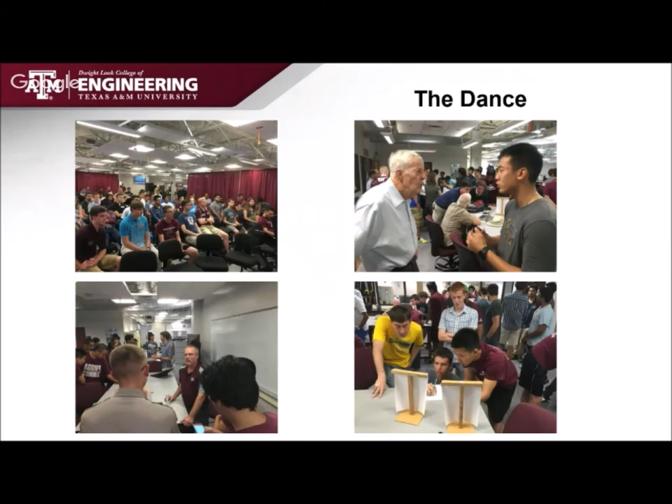Here's the dance. You started out getting going. You started talking to your mentors. You started finding out about need statements. You started forming your teams. There was this dance going on. It was speed dating. You had a great time. We fed you pizza. You found out what was going on.

Then the design. This is where the hard work started. This is where you started to understand a little bit more about what was going on. You were starting your design process. We told you, and you gave us 3 or 4 different designs, and then you had it down selected. Then you started building. I'm really excited about some of the builds that y'all have.

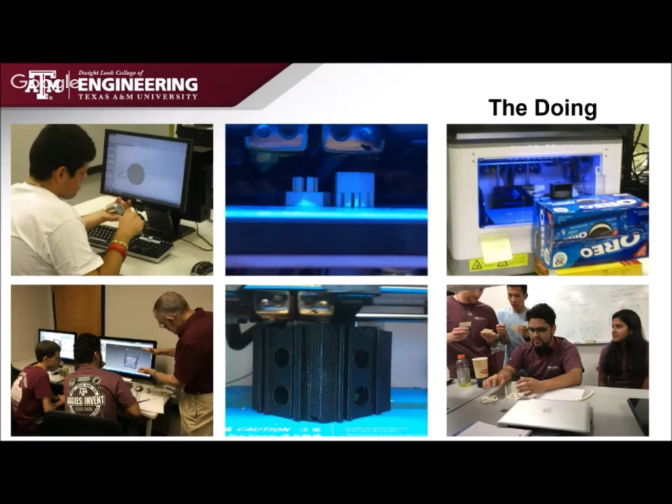Building, just so that you know, we had over 150 3D print jobs printed this weekend. That represents almost 500 individual parts. So we printed the heck out of things this whole weekend. Y'all did a great job of coming up with designs. You did a lot of testing. We saw some failures. We saw some great successes. So outstanding on that piece of it.

We watched a little bit of Aggie football. We streamed it. Whoop, and we won. Whoop. However, deadlines loomed, and the interest in the game waned really quickly. The entire place cleared out here in about 10 minutes. We watched the opening drive. The Aggies didn't do so great in their opening drive, and everybody kind of goes, I got to work on my presentation. So they left. Sleep was optional.

All right. So found some people sleeping on chairs under the 3D printers. I wanted to make sure they kept the jobs going. Found some people sleeping on couches, you know, wherever. But sleep was optional throughout this entire weekend.

Now's the deal. Now it's time for you all to sell it. We've got an outstanding selection of judges here, and I think you're going to enjoy seeing what we've got. You got 10 minutes for your presentation. Everyone take a look around. Turn around. See that timer back there?

It's going to start when you start. When it goes to 0, I'm pulling you off the stage. The reason is because it's not fair for everybody else. The judges will have 5 minutes to ask questions, and they'll be scoring you throughout the entire time. After we get finished, the judges and I are going to go into a room. We'll make some decisions, and then we'll choose first, second, and third place teams.

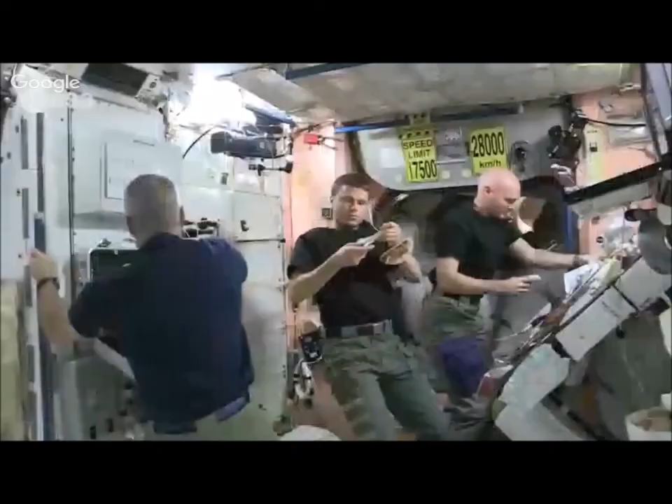A serious problem on the International Space Station is foreign object debris. Particulates such as hair and skin, food crumbs, and chips or fibers off of everyday objects can make their way into the station systems or an astronaut's eye.

My left eye slammed shut in great pain, and I couldn't figure out why my eye wasn't working. I was thinking, what do I do next? I thought, well, maybe that's why we have two eyes, so I kept working. But unfortunately, without gravity, tears don't fall. And so you just get a bigger and bigger ball of whatever that is mixed with your tears on your eye until eventually the ball becomes so big that the surface tension takes it across the bridge of your nose like a tiny little waterfall and goes goosh into your other eye. And now I was completely blind.

This device uses common adhesive materials such as duct tape to catch the debris that passes through the outer case, which then gets trapped by the sticky core. The Clean Sweep is also strong enough to withstand wall impacts of 5 feet per second or more without breaking or fracturing. You can stick it to the wall or let it float around to catch debris passively. In addition, you can physically grab it and sweep it through the mess for a quick cleanup.

So we are Team Clean Sweep, and as the astronaut you saw in the video, Chris Hadfield, said, there is no situation that you can't make worse, and this is especially true in space. If particulate debris is floating around, it can get into sensitive systems, it can get into experiments, it can get into your eyes or lungs, it can be a big problem.

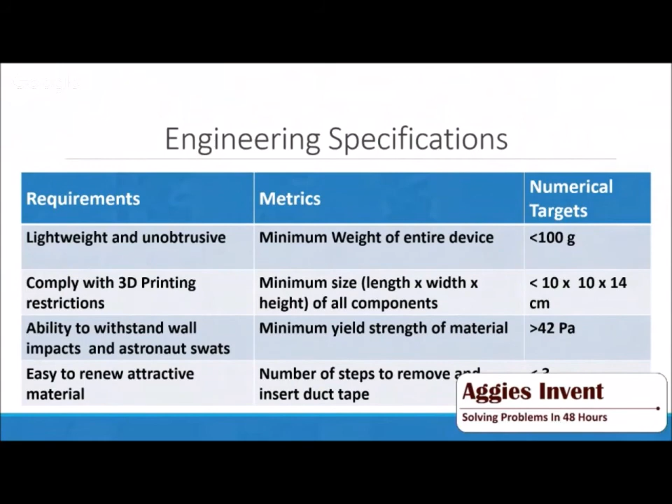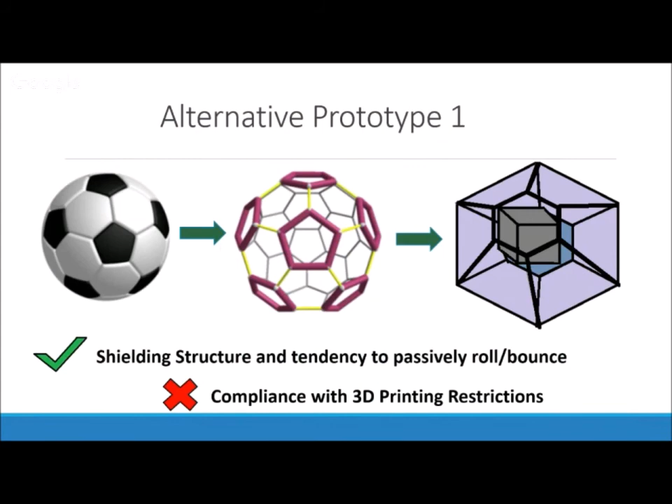Before we arrived at our final design, we had a couple of alternative ideas. We first thought of the structure of a soccer ball, and we saw that this would provide a strong shielding structure as well as be able to roll and move freely throughout the ISS. However, this wouldn't fit within the restrictions provided by 3D printing. We also thought about analyzing swallow birds, and how they use their beaks to capture insects and bugs while flying through the air. So we wanted to implement an inverted sticky structure that would maximize the surface area and easily trap particles. However, this would require some sort of propulsion, so we discarded this idea as well.

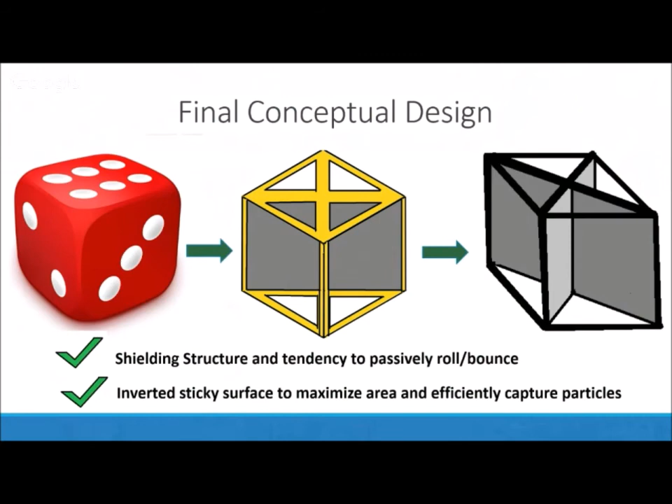Nonetheless, we combined the advantages from the previous two ideas into our final design that was based on the structure of a die. So we made sure it was structurally sound, it could roll and move around freely, and we also used an inverted sticky structure to maximize the surface area to capture particles.

We did some mathematical analysis using basic kinematic equations and the velocity given to us to find the pressure that would be exerted during a collision on our structure. We found that this pressure was such a small number. It was 10 to the power 5 times smaller than the actual yield strength of our material, which only goes to show that within a wide safety range, our structure is strong and structurally sound.

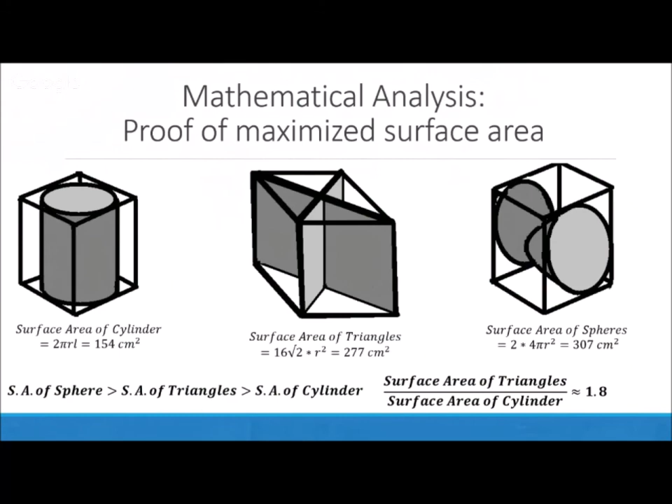We also analyzed the surface area of different designs. We found that our structure would be the best because it would provide 1.8 times larger surface area than that of a cylinder, and the spheres would provide a slightly larger surface area, but it would be a lot harder to wrap the tape around the spheres, so given the simplicity of the structure, this would be the most optimum design.

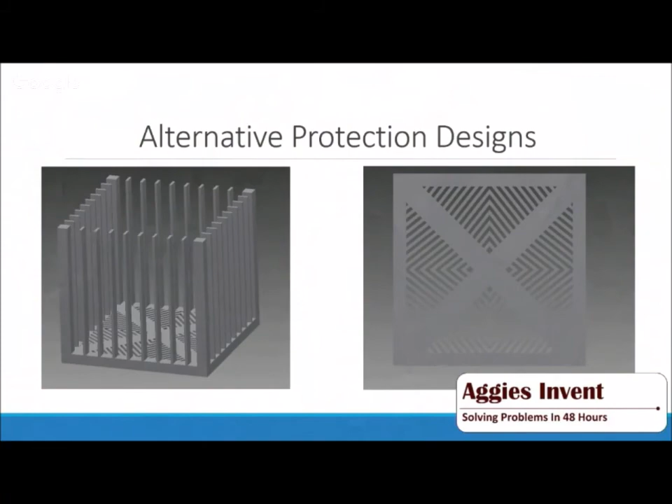As mentioned previously, we have definitely evolved from a popsicle stick design to a really nice 3D printed model. Our end product really met the size requirements as well as the weight, which is only 35 grams as opposed to the 100 gram limit. In addition, we were able to implement a dual tape application. When it's passive and floating around the ISS, there are tapes on each end of this cross section, kind of like a filter. But if there is ever a spill, an astronaut can easily tape it inverted and wrap it around in less than 30 seconds to sweep up all the mess. And we've tested it. It's very structurally sturdy. It's small, doesn't get in the way, and it's a really neat design.

For some alternative implementations, we can use this as a portable storage device. If it's floating around and you happen to have a pen, you can store pens in there. We can use this for recreation purposes as well, putting LED lights or even using this as a die to play games. And lastly, we heard from a few astronauts that it may get a little smelly inside, so you can actually open the cartridge and put an air filter there too. So there are many implementations for this. For future improvements, we can add some photoluminescent materials to light up the way when it's dark on the ISS.

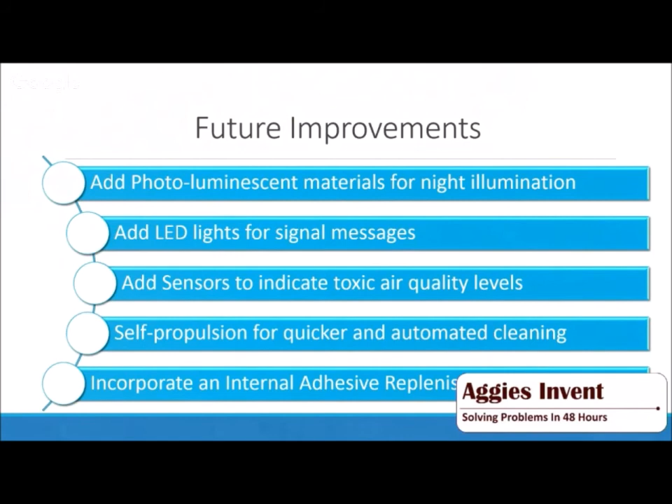We can also add some LEDs to it to determine when you need to change the adhesive materials. We could also add some sensors, if we are allowed to use some circuitry, to detect toxic air levels within the ISS. We can also add some self-propulsion so that it can be completely autonomous. It can just cruise around the space station and clean up areas that it needs to clean up.

Then also we can incorporate a system where they have the tape inside of the system itself. So instead of astronauts going about trying to find materials to put onto our Clean Sweep, it's actually in there and you can dispense it and then apply it as well.

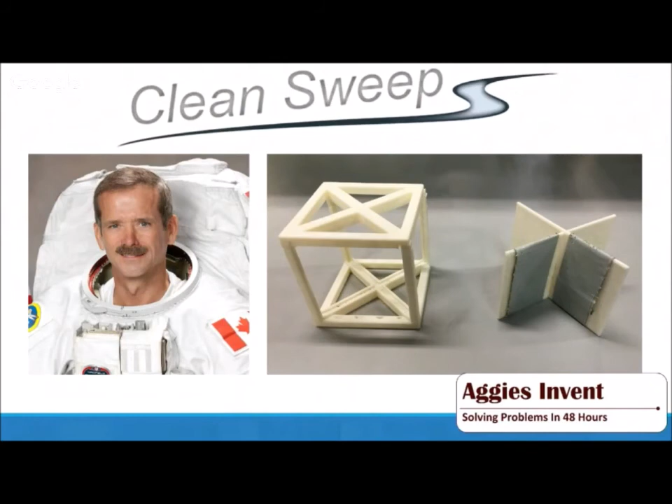And so the main problem on the ISS, or a big problem that Chris Hadfield was talking about, was the debris on the ISS. These debris get into an astronaut's eye, hinder them from doing their job, and also these foreign objects can get into different electronics and potentially harm and damage them. So we decided to create the solution called Clean Sweep.

The way it works is that you apply the adhesive on the inside and also the outside if you choose to. Then foreign objects will come and attach themselves to the Clean Sweep, and it stays on, it doesn't come off. So you can pass that around if you want.

So it's a very simple system, and we developed it to be 3D printed on the ISS. So instead of sending these up to the space station, which is both costly and not efficient, we can send up our plans, have them manufactured on site and assembled, and it just makes it a lot more efficient and a lot easier for the astronauts. This system also has a high potential to be something greater, and that is why we decided to develop the Clean Sweep. Thank you.

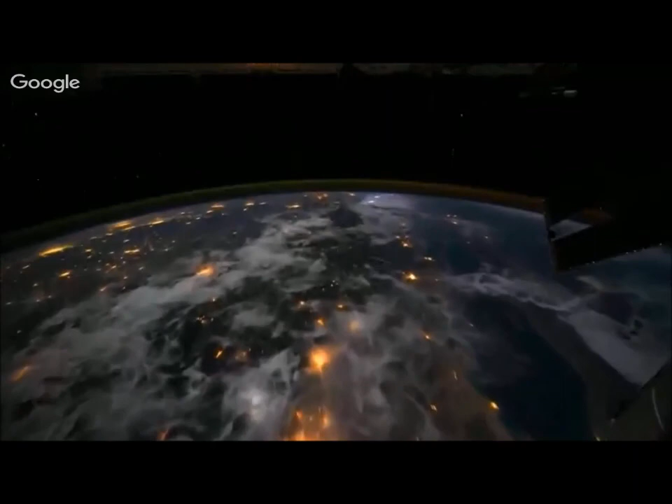A famous Jedi once said, "Do or do not, there is no try." Every year, billions of dollars are spent on space research. Data for this research is collected through the use of several large satellites. Enter the CubeSat.

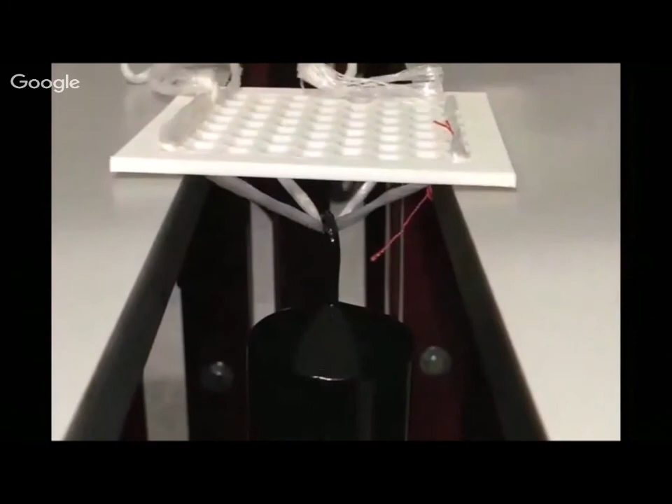CubeSat is a picosatellite that simplifies satellite design immensely and is contained within a 1-liter volume cube. Today, the ISS has 3D printing capabilities, providing opportunities for a revolution in CubeSat manufacturing. Now, instead of a CubeSat being assembled and launched in one piece, we can 3D print the frame and assemble it on the ISS. Welcome aboard Cube Station. Cheaper and lighter. Cube Station, the universe in our hands.

Howdy. I'm Mark Wager. I'm Nathan Glazer. I'm Andy Castrua. I'm Siva Praneeth. I'm Ronak Mohanty. And we are Cube Station, CSAT for short.

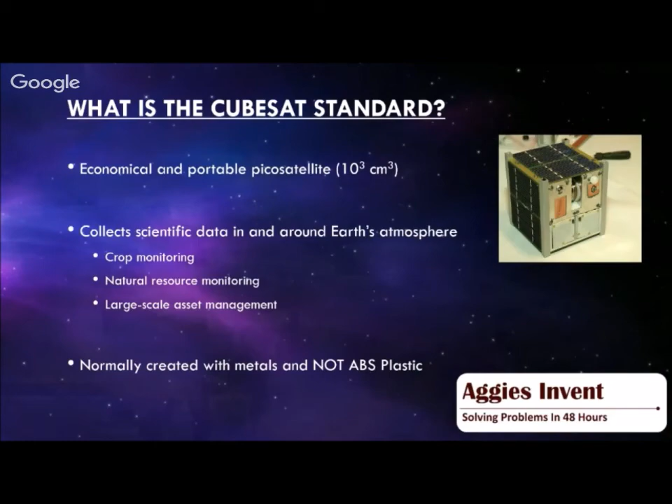What is the CubeSat standard? Well, CubeSat is an economical and portable picosatellite that is roughly 10 centimeters cubed. What it's used for is mostly for collecting scientific data in and around Earth's atmosphere. Applications include natural resource management, large-scale asset management, and also crop resource management.

Normally, a CubeSat is created with either aluminum or steel parts and shipped up via rocket to the ISS and launched from there. However, we plan to use a 3D printer on board the ISS and print it with ABS plastic. Now, you may ask, why CubeSat? Why not just a regular satellite? Well, CubeSat is significantly cost-effective compared to these large satellites, and it's very modular in design, allowing for easy shipment and very easy redesign.

Okay, so over the past 48 hours, our main objective was to design and develop a telescope support structure that can be 3D printed in space. We were given this project statement with a set of constraints. Part of these constraints contributed to size considerations, as well as putting solar panels onto the outside, and the final structure being able to withstand a deploying force of 45 newtons. We also wanted the entire structure to be easy to assemble and to contain as few parts as possible.

And what sets us apart is our stretch goals. The main stretch goal is that we want to print something roughly 3 times the print volume. That way, the astronauts printing this material don't have to babysit the 3D printer as they go through the cycles. We also put in considerations for electronics, because that is one of the main reasons why most satellites fail in orbit.

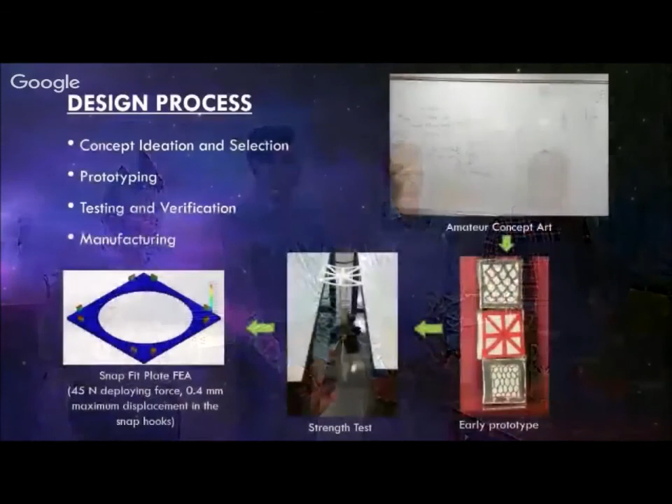We met these design criteria through our design process. First, we went through whiteboard concept development, then prototyping, then subcomponent testing, and eventually we covered manufacturing processes.

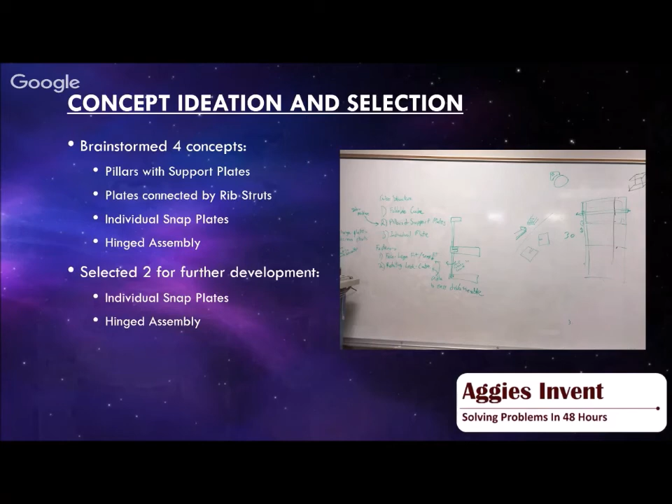Our initial brainstorm yielded 4 solid concepts that we were interested in implementing for our own CubeSat design. From these 4 designs, we narrowed down our advantages, and after the first night, we only developed 2 of those designs. The first was to print individual faces for these cubes and assemble them via snap hooks. The second was to have pre-assembled hinges on the structures themselves to reduce the assembly time and number of components.

So instead of printing a bunch of large assemblies that we weren't sure would work or fit together, we decided to test the individual components before moving to the assembly level. As you can see, we printed out individual faceplates, hinges, and snap hooks, and tested those individually for feasibility as well as strength, for example, on the faceplates.

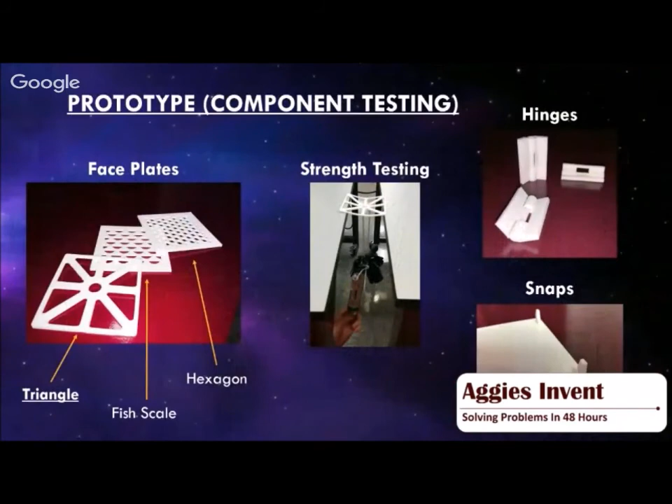One of the more notable discoveries from this method was that these hinges could actually be printed in place, yielding a pre-assembled hinge right off the printer. Those are printed vertically, as you can see in the upper right picture there. The judges are looking at those right now. We actually have a hinge that works right off the printer.

From that component testing, we also looked at a benefit analysis of where we want to move forward in our design. Our two main choices were: do we want to use those snap hooks and rely on individual plates hooked together, or did we want to pursue the hinge design? Ultimately, we decided to move forward with the hinges because even though they require stricter tolerances to get the clearances right, the assembly savings they provided were a great benefit for the astronauts.

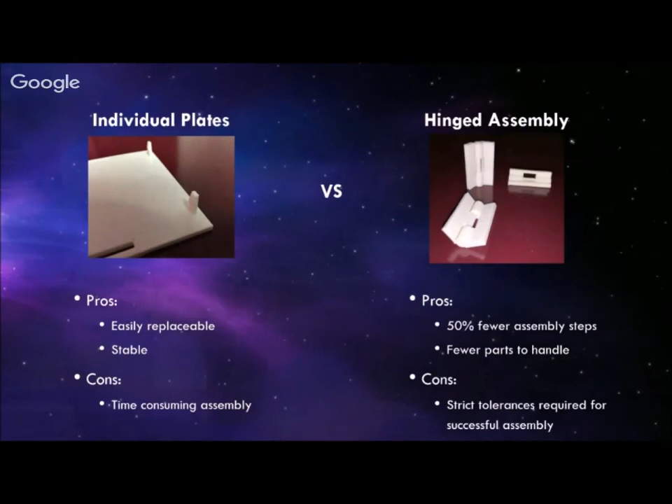This is our final design of one unit of the cube. We will use 3 such units to form our assembly.

As Nathan pointed out, the main constraint we had was to build the entire set of 3 cubes within a given volume of 10 by 10 by 14 centimeters.

On your right, you can see the printed configuration of this stacked structure of 4 plates. This will save a lot of maintenance time for astronauts, because they are printing everything in one single print rather than 3. On the bottom right, you can see the assembled configuration.

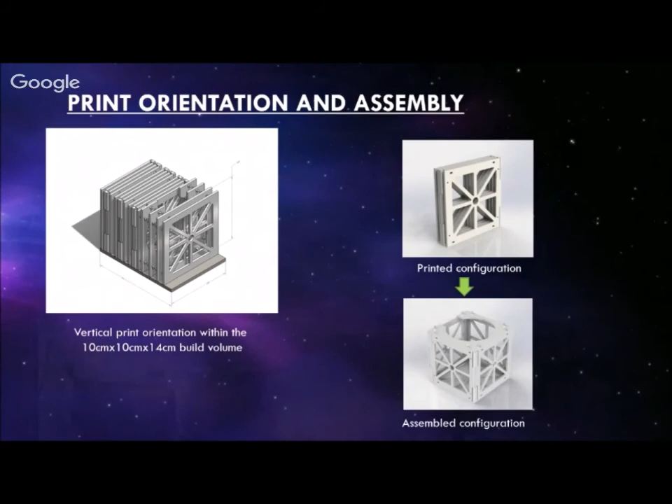The printed configuration can be folded out and snapped together to form a square structure first, and further supported with the help of support plates on the top and bottom, which also reinforce the support for the telescope.

Zooming into the detailed view of the salient features, one of the most important is the hinges, as Nathan pointed out. The hinges reduce the assembly time, and we are using 3D printing to our advantage here to save that much time.

We are using traditional snap hooks to reduce the assembly time again, and there are provisions for holes for the solar panels, and we have the optimized structure for mass reduction.

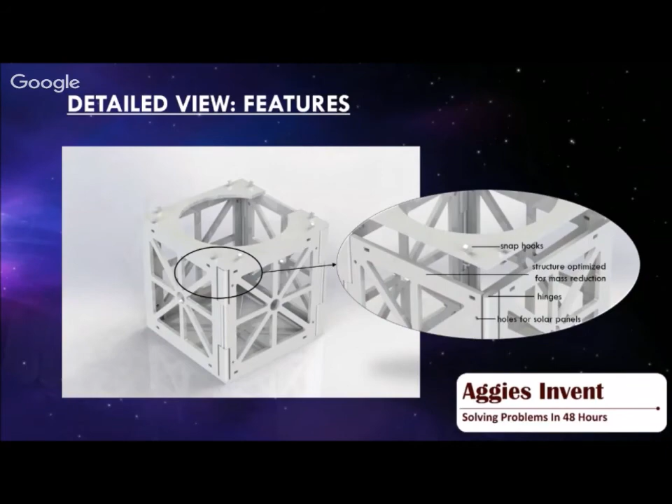So as you can see, the final assembly on the screen: you have the 3 cubes stacked over each other. We have the provision for the telescope, the bottom one for electronics, and provisions on 4 sides for the solar panels. This is how the final assembly would look with the solar panels on it.

What you see here on the table is the final representation that we 3D printed. You have this triangular structure saving materials, the hinges, and the snap fits here. You can have a look.

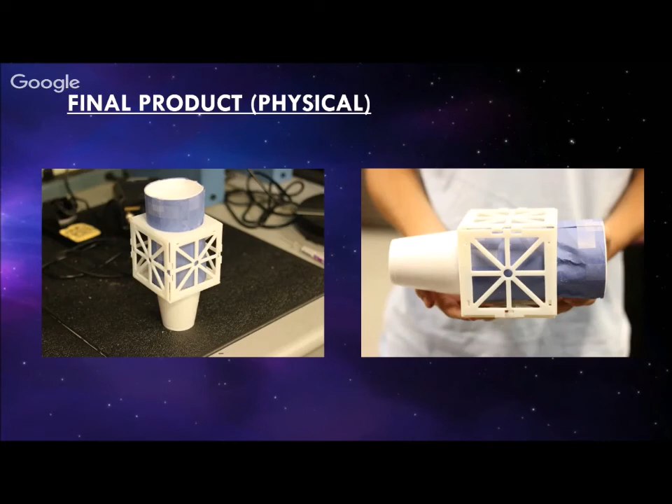Unfortunately, a purely mechanical solution may overlook one of the most common failure avenues for orbiting satellites, called total ionizing dose. On Earth, when charge builds up in a cloud, eventually there's enough voltage difference that there's a dielectric breakdown, causing lightning. The same thing can happen with any dielectric.

ABS plastic is actually pretty close to air in terms of dielectric constant. So as charge accumulates on one side of the satellite from particles emitted from the sun, eventually there can be a static discharge that can destroy electronic components.

In our design, we've accounted for this. We've allowed for attachment points for a Faraday cage that protects all of the inside components from this sort of damage.

Now coming to cost: manufacturing a traditional aluminum CubeSat would take around $300,000 US, which is a lot of money. To make 3D printing feasible, the raw materials weigh less than 200 grams, and the weight of the CubeSat would be less than 1 kilogram. The final deploying cost would be around $80,000 US, which is significantly less.

So it's wiser to manufacture the CubeSat on the ISS rather than sending them from Earth, which costs a lot, and this saves material, time, and money for the astronauts and the space research as well. Do you have any questions?

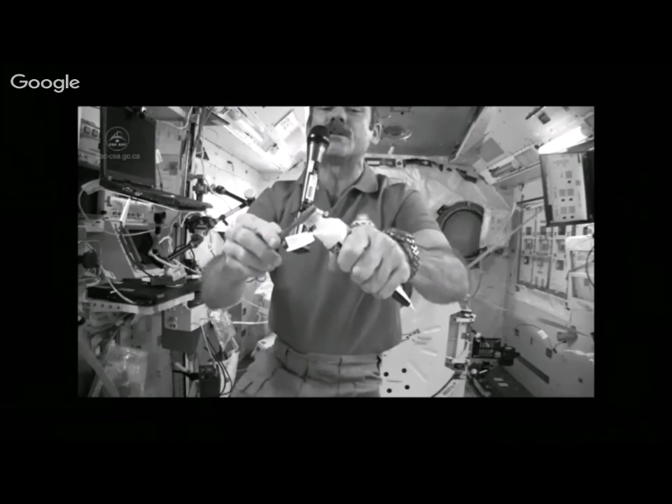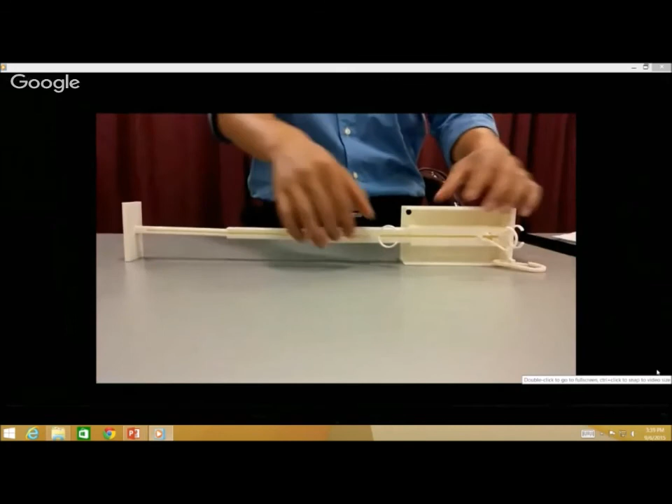All right, so as you can see, we're group AstroLog. We're actually crew convenience, so our needs statement wanted us to design a reliable, versatile, non-intrusive, space-efficient organizing equipment. So I'll leave it up to my teammates.

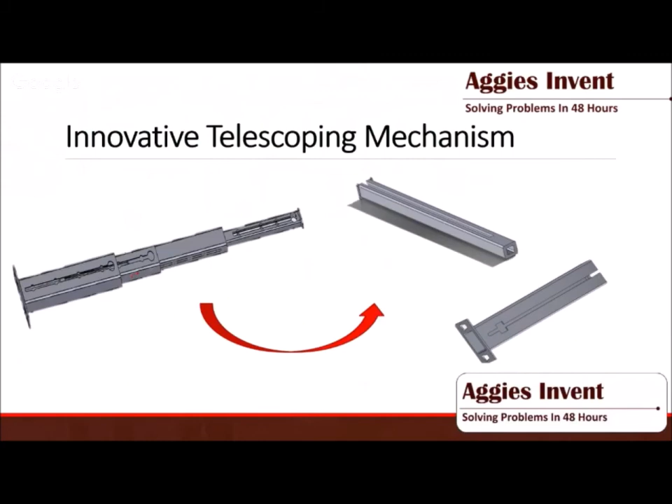So as you saw in the video, we have a telescoping mechanism that we're using to expand our restraining device to allow more tools to be set. So we have a T-groove running from the right end to the left end, which could be used to enter the restraining fixtures and slide all the way in. And we have enough clearance for them to slide around, but not so much for them to come out, rotate and come out of the device.

So the main concern was multi-utility, so that we could store small and mid-sized objects in the device. But working in microgravity, most of the locking mechanisms that we use are in some way or another connected with gravity, so we didn't want to use the traditional ones.

In microgravity, we used ABS plastic to our advantage. First of all, no weight, or very less weight, so we didn't have to put a lot of concern into if they'll hold up or break - that was not our concern. Secondly, the ABS plastic is elastic, tough between 20 to 80 degrees Celsius temperature range, and has good impact resistance. So we decided to mainly take advantage of the elasticity for the fixtures to clamp onto mid-sized and small objects.

So the first fixture that you see on the left is a tool holder. Suppose an astronaut is using a bunch of tools and working on a project, he or she could clamp it onto a hammer handle, a wrench, a bunch of tools in there.

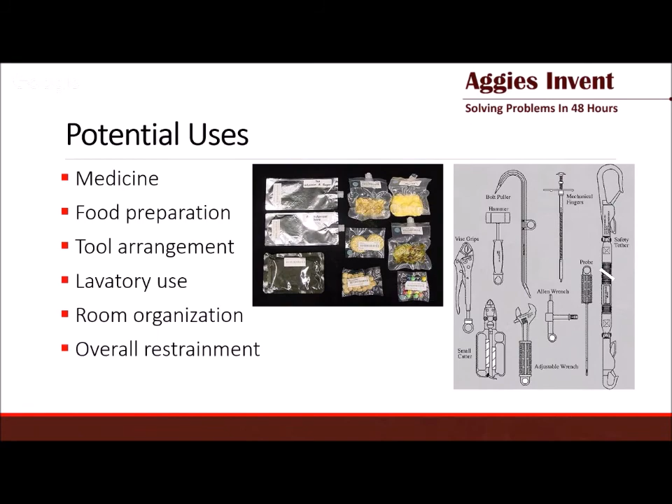We can also use it for lavatory use, so you don't hit yourself with a brush whenever you're trying to do certain things in the lavatory. And room organization and overall restraint. So anything you want can be kept to the wall. And as we talked, if you were to print two AstroLogs, you can keep anything attached to the wall. And the only limit is imagination for that use.

We want to say special thanks to these people; they have truly guided us, and we're truly thankful for all the help throughout these 48 hours. And we wanted to say special thanks to all of them.

I wanted to say at the end, AstroLog is a time-saving device. And in space, every second counts. Thank you very much.

What questions do you all have? Please. Is this left-handed or right-handed? Sorry? Which one? It could be either or, because you could rotate it any way. It's completely multi-directional as well.

And if I may, a second question: describe an awkward moment during these 48 hours in your team. An awkward moment? So the hardest part of designing this was the telescoping mechanism. We actually went through a lot of trials just to get that done. The first time we did it, it didn't go through. The second time, when we put it through, it slipped out, so it wouldn't hold. And then finally on the third one, thanks to Daniel, he made a groove at the end of each one and allowed it to pull out and hold in place while you stretched it. And when you closed it, it wouldn't come out. So that was, I guess, the weirdest moment. Yeah. 8 hours sprinting and then boop, falling off.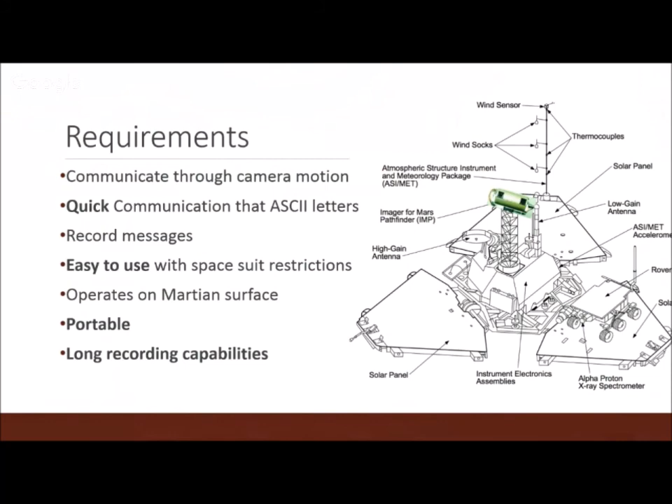It has to be portable, and instead of the limited space it has on the ground to just inscribe on the dirt each letter, it has to be able to record more than just a phrase, however long the space station needs to communicate with this astronaut. So this was basically the temporary solution. He would go inside and write something, and then he'd go outside, place it on there, and they would turn the camera so that the space station could communicate back to the astronaut. And so, of course, this took a lot of time. And so with our solution.

All right, I'm going to take over and talk more about the technical aspects of our proposed solution and how we ended up making it. So, as in the book, the character lays down the cards and rotates the camera towards them. The controller controls the camera. The controller is back at Earth, and in order to communicate, he controls the camera, moves it, points it towards the card that's placed on the ground, and then letter by letter, he forms a sentence. First, that requires the person to be in a spacesuit on the surface, and it's really time-consuming. So what we wanted to make was a mechanical translator and a decoder.

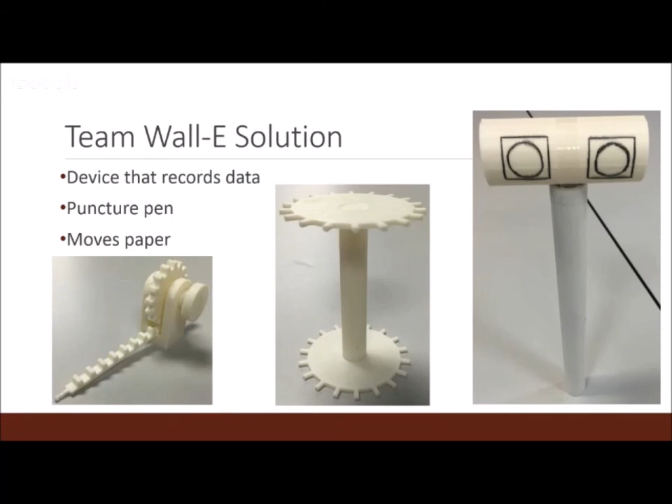That's its essence. The third picture that you see on your screen, the one with the eyes for lenses, that's what's provided. That's the camera on the Pathfinder probe. The first two images are the gear and rack assembly that we manufacture, and the second is the gear roll binder assembly. I'll talk more about it.

Then we had to decide what mode we are going to communicate in. How are we going to make sense of those angular movements? These are the only thing we're receiving as an astronaut in space. Like angular movements of the camera, like a 60-degree rotation along the y-axis. What does it mean? We had to translate it into a symbol to make sense of it. So we went over 3 different sorts of codes that we could use: Braille, Morse code, and a waveform. The waveform mechanism does not rely on a puncher base, a hammerhead, so we don't have to print that part. That's the first one we considered. Later we ruled it out. I'm going to tell you why.

So in the waveform mechanism, you can have a pen or a Sharpie or any writing instrument sticking out of it and use the angular rotation along this axis to inscribe a line on the paper that's held in the paper binder. What happens when you inscribe a line and then you translate the paper? You generate a wave. Every wavefront with a particular amplitude and a particular wavelength can be translated into a different symbol. But in that case, you have to establish the code.

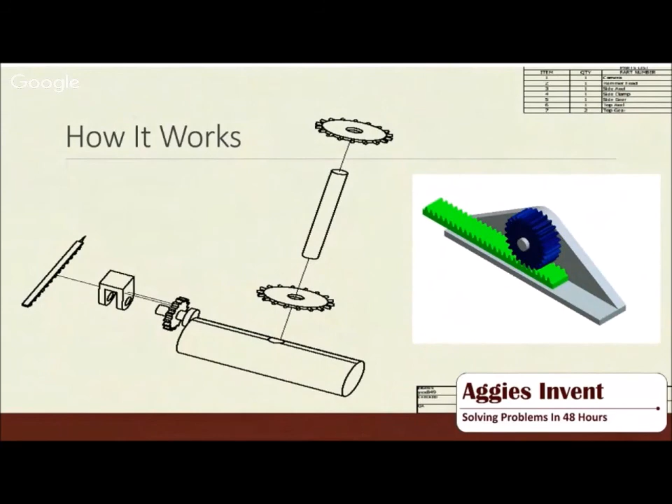Not too hard to do, because you can establish an arithmetic progression where every one angular rotation takes you to the next letter in the series. Not the hardest part, but pens are unreliable, and also something that we don't know if he has access to all the time and if he can use it. So we came up with a mechanical device that does not rely on having a pen or a Sharpie. So we went with Morse and Braille because they can be produced with a puncher-based mechanism, only with the use of the hammerhead.

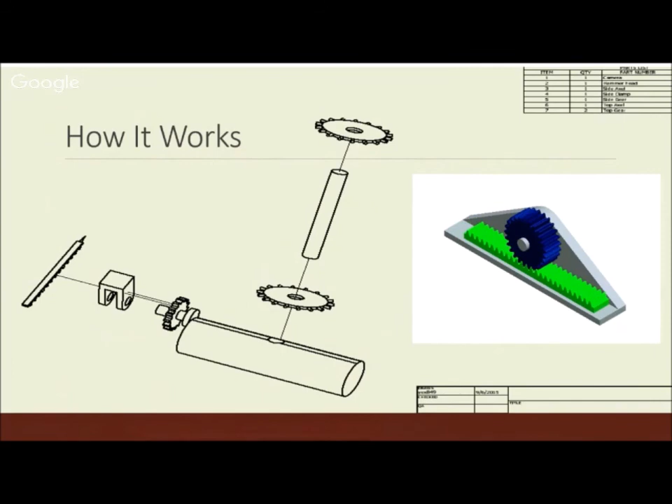As you can see in the assembly, that gear converts the angular rotational motion to the translation of the hammerhead. The green thing, that's going to be our hammerhead. It's just going to be pointing at one end. And the other parts in the exploded assembly that I'm going to go over are the axle and the two gears that you see at the top. They're going to be punched into a paper, and rotation along this axis is going to translate the paper along that line, just like you would do in a dot matrix printer or an old typewriter, where you would have 2 dots at the end. That's because the binder would have 2 gears at the end, and it would rotate and feed the paper.

Benefits. The biggest benefit, you don't have to be present on the surface. This thing will record messages for you. Totally. You don't have to be present there. It will keep a track of the recorded messages.

The only limiting factor will be how fast you can generate, which is the angular velocity of the camera on the Pathfinder probe, and the amount of paper you have access to. We are also making the assumption that we have quite a lot of paper, and duct tape is the only thing we can use. So that wasn't really a problem for us.

You don't need a pen. All the decoding can be done in the HAB unit. This is the unit the astronaut's going to be in when he's not outside. So limited interaction.

Beyond our project, one more important thing that we considered was when we are designing something to be 3D printed, a really important factor that we want to pay attention to is the reusability of each individual part that you print. What we are printing is just an assembly of gears, axles, racks, all parts that can be printed and reused for many applications. Thank you.

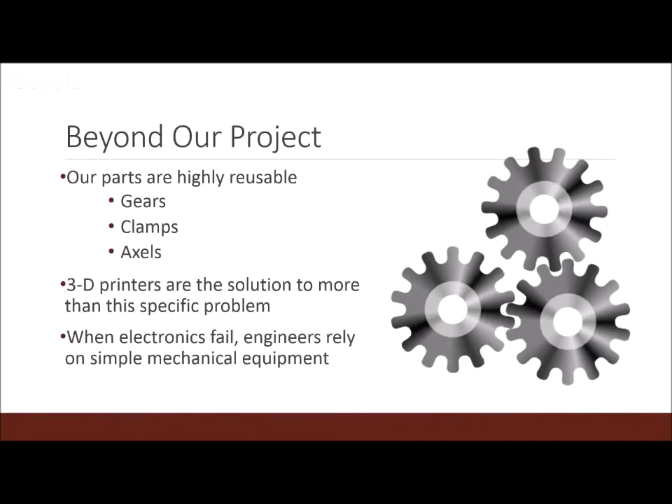Yeah, go ahead. So the dot matrix paper, are we going to bring dot matrix paper to Mars? No, we just said sheets of paper. Just the sheets of paper. The binder will pierce itself. That seems pretty integral to your solution. Yeah, it has to pierce through the paper, and then when it's rotating, that has to translate into translatory motion. It has to linearly forward the paper.

Any other questions? Is it possible to transmit emotion through this device? If it is possible to transmit emotions through text, then yes. Same process, same way. If you can make sense of what they say and what intent they wrote that message with, then I guess you can relate with the person who wrote it and what emotions were put into writing it. It's more like a personal thing. Okay, thanks very much.

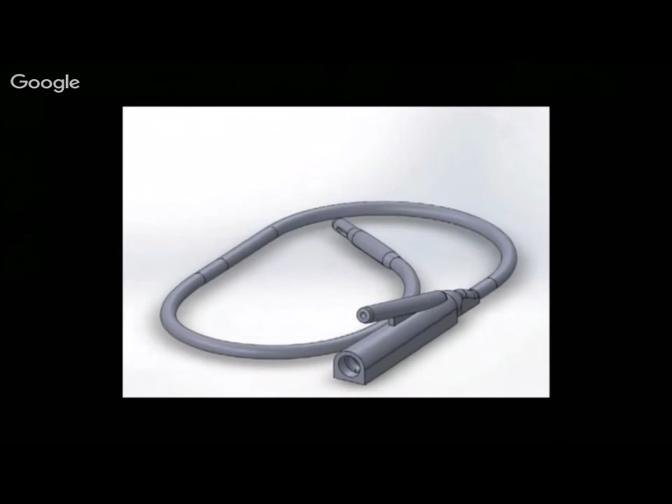It's such an easy thing to fix if you have the proper equipment, but it can be fatal if not. If I was the doctor going to Mars, I wouldn't let the bladder burst, but if I didn't have a catheter, I would have to surgically go in with all the possibilities of infection, bleeding and complications. I'd much rather have a catheter. If we can migrate to doing things in orbit rather than on the ground, we're going to be able to do more, do it better and save money.

I'm Jane. I'm Robert. And I'm Jacob. And we are Starfleet Medical. We were tasked by Dr. Kerwin to design a 3D printable Foley catheter to print onboard the ISS in case there's a need for replacement. As stated by Kylie Ryan, it's not a frequent problem, but it is a huge problem if it does occur.

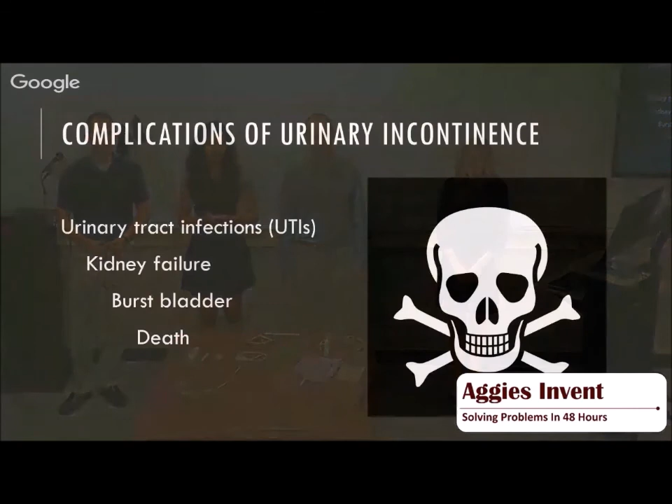When you're in space, microgravity changes the way that you feel the urine in your bladder. So when your bladder is super full, you can't really tell that you need to go and relieve yourself, which means a lot of astronauts don't go to the bathroom as frequently, and it results in urinary tract infections, kidney failure, a burst bladder, or death.

And when you're inserting a catheter, you take this tip and you insert it into the urethra, and once it reaches your bladder, there's a balloon here that expands and it anchors the catheter into the bladder. And once that is filled, there's a hole in the tip that drains urine from the tip of the catheter into a drainage port here that is connected to a bag like this.

So there are two main types of catheters. There's the Foley catheter, which we've been discussing, which we were tasked with designing. There's also a straight catheter. And so the advantage of using a Foley catheter is it can be anchored in place by the balloon for up to 30 days, whereas the straight catheter is a single-use catheter. You put it in, you evacuate the bladder, and you remove it. And so in terms of space travel, you'd have to take many of these to do the same job as one Foley catheter.

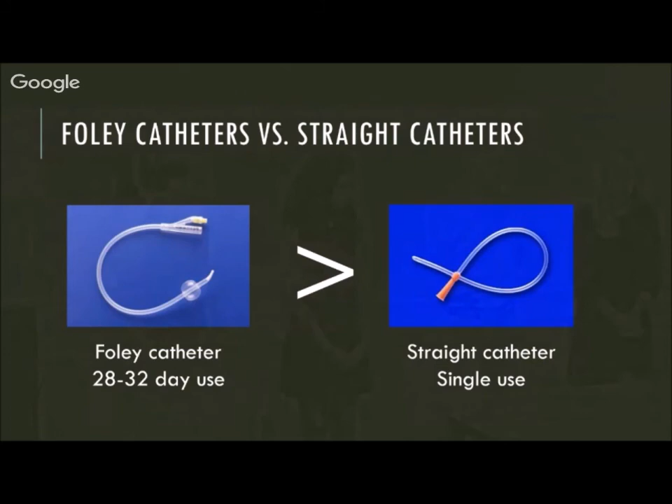And then some of the constraints we had to look at, since it is a medical device, we needed to be able to produce a sterile device that could contain bodily fluids. It had to be flexible to comply to the patient's physiology, and it had to be biocompatible. And then the two big constraints were we had to 3D print something that could be anchored and then removed, which was crucial. And so since we were 3D printing in plastic, we initially thought we couldn't do the balloon method, so we came up with 3 different ideas.

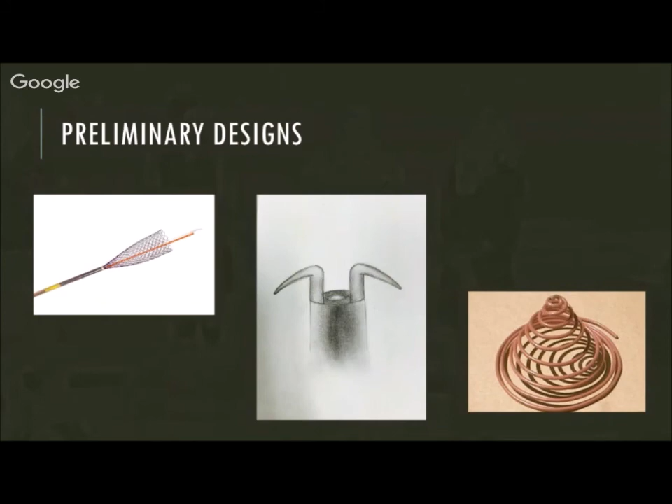And then our third option was using shape memory polymers, which when subject to a stimulus such as light or heat, will change shape. So we would initially have the shape be a straight rod, similar to these catheters on the table. And when you insert it and then apply a stimulus, it'll change to this spiral shape seen in the picture on the slide. And on the second day, we actually realized that there are companies printing in silicone, so we could revert back to the balloon method, which we're going to talk about now.

So the silicone that's been used in these 3D printers before is actually a medical grade silicone. This material already exists. There's no research and development that has to be done. You just use the material as is. And so using this material to 3D print, what sort of constraints are different from 3D printing compared to typical manufacturing methods that are done here on Earth? In order to accomplish these objectives, there's a few things that we had to change about our design compared to a typical Foley catheter design, primarily the inflation port, where the balloon is inflated, as well as the geometry of the balloon itself.

And the material that's used for the Foley catheters, the medical grade silicone, won't just have to be used for these catheters on the space station or in future missions. It can be used for a variety of medical applications that use silicones, and most interestingly, 3D printing contact lenses as well. So this is the final design on the screen for the Foley catheter we have. We also have a 3D model that we printed in plastic, if you'd like to pass that around.

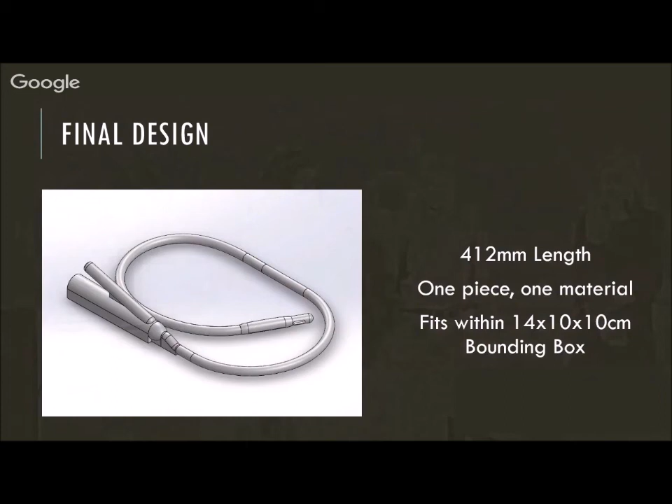Obviously, you don't want the plastic to be used, but some of the dimensions: the overall length of the tube itself, not including the ports, is 412 millimeters. This meets the design constraints that were given to us by Dr. Kerwin. And what's really nice about this piece in particular is it's printed in one go and one material. It simplifies the design and requires no assembly once it's removed from the 3D printer. It can be used as is, or it can be stored immediately, less handling required, and less complications from that. And it all fits within the constraints of the bounding box that was given to us.

So the urine will flow through this larger hole, that's the larger port there, and flows into the bag for collection. And what's different about our design, what I mentioned earlier, is how the inflation process is done. So the top port is where the inflation takes place. A typical Foley catheter, including the one that we have up here, uses a spring check valve to allow the saline to be inserted and removed from the system.

So something we did to simplify our design, we don't have to have different materials, we don't have to print multiple components, because we printed it all just in silicone. So it's a silicone barrier that can be pierced with a needle, similar to how a medicine bottle has a cap that can be pierced to have the medicine extracted with a syringe. So we can insert the saline with the syringe, remove the syringe, and it seals itself with the silicone barrier. And whenever we need to remove the fluid, we just repeat the process to drain it as well.

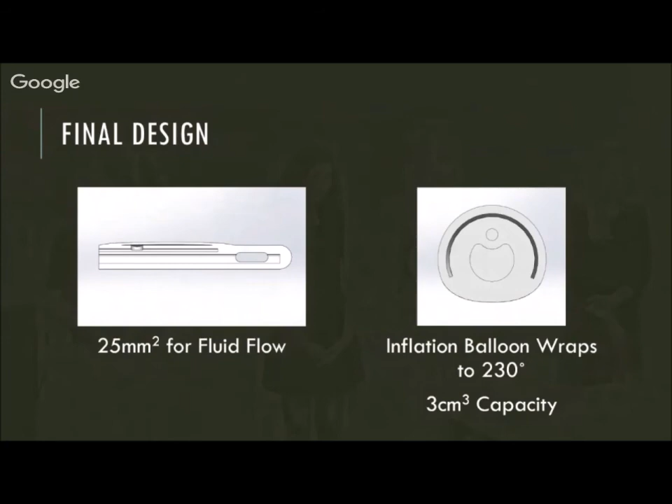And so the other thing that's different about our design is the catheter balloon itself. It's kind of hard to see, I'm sorry if it's difficult to tell. On the left side is the side view of the balloon area of the catheter port. There's a very small geometry in the top left corner there. This is a thin wall of silicone material, and there's a port there where the silicone inflation port runs to. And whenever the saline reaches there, it expands 360 degrees and basically anchors the catheter in place.

So what's different about our design, because of the 3D printing, is that we need to have a flat base for the material to be printed on. So we can't have this hollow concentric ring completely around. So we instead printed it 230 degrees. It'll still inflate to enough capacity to be able to hold the catheter in place.

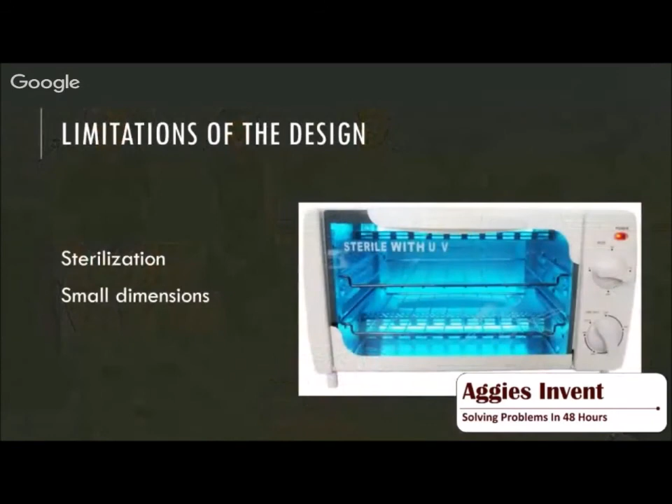Okay, so some of the limitations include sterilization, because while it is printed sterile, you can't store it in a sterile environment. You would have to take it off and use it immediately for its purpose. Also, the small dimensions lead to a possibility of something messing up in the printing. Some of our future work that we're excited about is the idea of printing it inside of a sterile pouch, which is already being done with 3D printing food. It'll be printed inside the bag, and then you can take it out and the bag will actually double as the collection bag. So that's something in our future that we hope to do.

And another thing would be, since we only used one material and our constraint was that we could use two, we would hope to use the second material as a hydrophilic coating on the catheter, which acts to take the place of a lubricant. And so if you get the catheter wet, if it has this coating on it, then it'll do that purpose without needing any extra material.

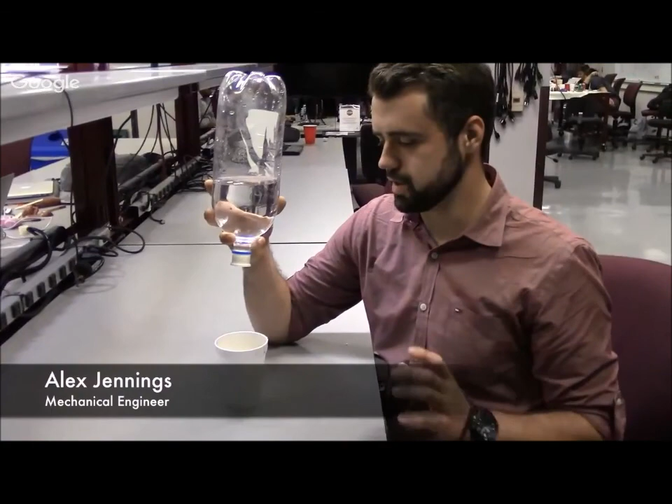Okay, so this device allows you to control the flow of the wick. You can have it in an open or closed position, and right now it's in the closed position, and you can see it blocks all the flow from coming out of the cap. It's a basic sliding mechanism—right now it's closed, and if you slide it, it opens, allowing the flow to come up through the wick and out the top.

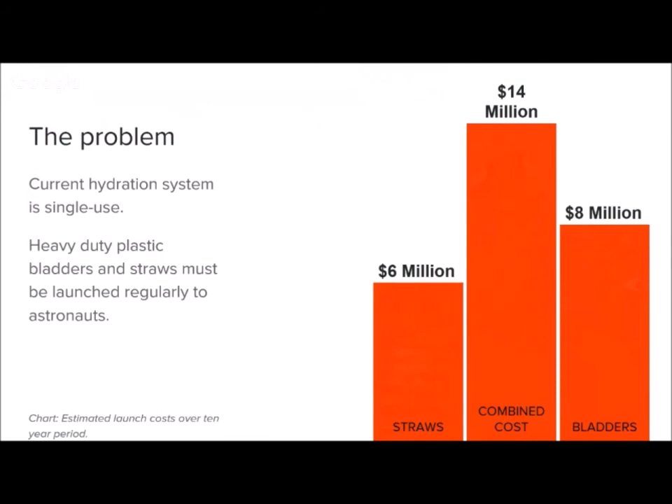The way we can do it is by 3D printing. If we design a device or system that can be printed with multiple iterations, it could reduce the cost of shipping into space. So the way we would do this is in 3 simple steps: print, drink, and recycle. With print, astronauts could print a cap, an insert, and a bottle in the future, allowing them to print it multiple times whenever they want. With drinking, astronauts can fill their receptacle, their bottle or pouch, whatever they print, with the beverage of their choice, put the insert in, put the cap on, and drink like they would on Earth.

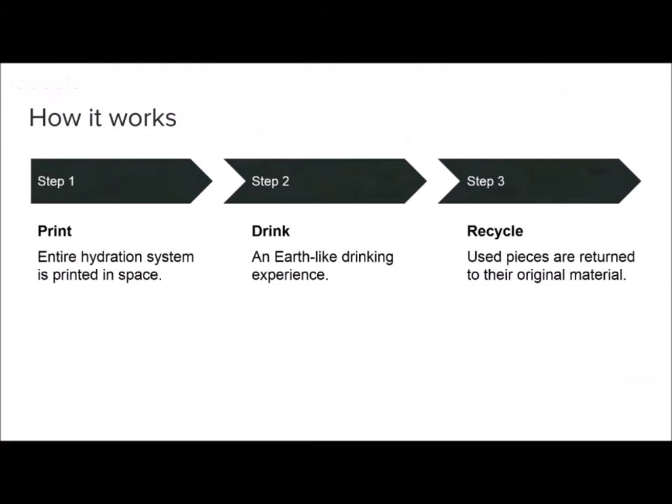It would represent like drinking out of a water bottle at home. And with that, since it can be sealed, they can move around the space station, and it's recyclable. So everything that they create can be melted down, and they can reuse it again to create more caps and inserts.

So one of our primary objectives in designing this whole project was to make it more Earth-like when you're drinking. One of the things we wanted to try to avoid was using a straw like they do currently on the space station, because let's face it...

We got paired with Saber Astronautics and their president, Dr. Jason Held. He was our teammate and mentor. And what Saber Astronautics has going on, you guys saw in the video, they have this cool insert, and it can fit to pretty much any bottle. You just drop it in, it doesn't attach to anything, and it brings the fluid from the bottom of the container to the top.

Previously, they had to suck because of the microgravity. How you normally get water from a water bottle to your mouth is by drinking it, and the gravity falls in. So what this thing is, unfortunately, although I know Aggies don't lie, cheat, or steal, we can't show you the specs because it's pretty confidential. But as we explained in the video, it's just the surface tension of the water combined with the high surface energy of the material of the insert that allows the flow, a driving force to push the liquid to the top.

Now the problem, and this has been tested, they did it in some parabolic space flights, as you saw, and it's proven that it actually does work. The problem, though, is that once the flow starts, it doesn't really stop. So we were tasked with finding a solution to that.

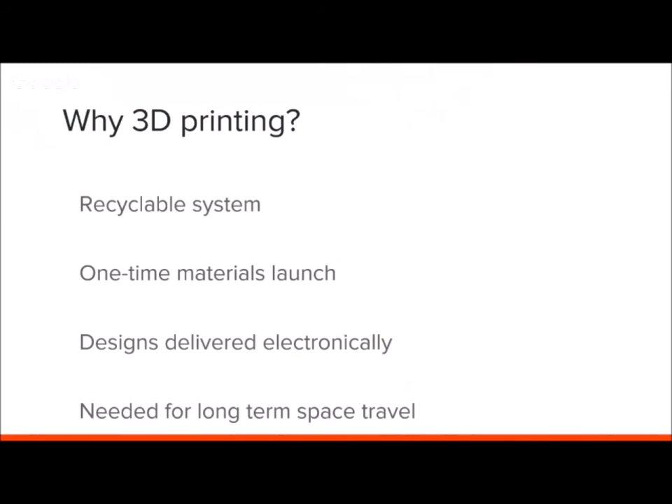Okay, so why 3D print? Our system is a recyclable system. So you create your product, you use your product, and then you melt your product back into its original feedstock. What that does is it only requires one material launch. So instead of having, say, 4 resupply missions, you're only going to have 1.

And because you're reducing the plastic bags, the straws, and a bunch of other stuff, that can just be simply printed on the International Space Station. So another perk is that you can send our designs electronically. Let's say you wanted to have an experiment on a pressure vessel, to see how a fluid acts in some awkward container. What you could do is take our product, and all you'd have to do is change, say, the threads on our CAD file, and you could run any experiment from anywhere else in the world.

So finally, our product is needed for long-term space travel. If you want to send someone to Mars, you do not want to make them drink out of a plastic bag with a straw the entire way. That's inhumane. It is. So that is why our product is needed on the International Space Station today.

So in terms of revenue model, there's kind of 2 main things. One is savings and one is earnings. In terms of savings, you're reducing your manufacturing costs considerably. You don't have to have them made on Earth. So the cost of 3D printing this material takes a very small amount of material. Our cap is almost immeasurable, it's just this tiny piece of plastic.

And of course, the insert is also 3D printed, that's the SpaceSip piece, it's 3D printed as well. It doesn't use very much either, and any bottle designs in the future would use more. But in general, we're talking about considerably reduced manufacturing costs. And then also the operating cost for your mission is considerably reduced as well by the recycling system that we would like to implement with this, or that this would be used in complement with.

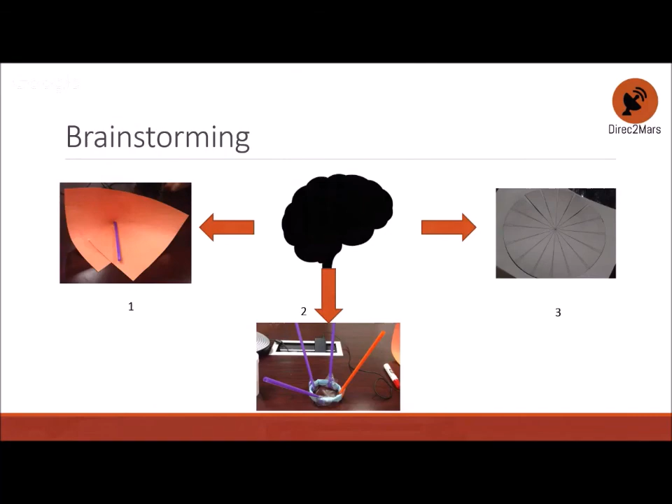This design is easily manufacturable and maintainable. The third one was creating a sort of parabolic spheroid, where we do cross cutting of that spheroid and basically 3D print it. The main problem with this idea was the constraint of the 14 by 10 by 10 cube, and we couldn't print this design. So basically, we selected the second design, which was very simple, efficient, and satisfies all the requirements. So I'm going to pass it to Carlos, who's going to explain more about the mathematical models we used.

Thank you. So basically, what we have here is a problem where we have a parabola and our ribs will set the edges of the parabola. So we have to make the parabola as big as possible to concentrate all the energy that comes from the base station, and then it bounces to the focal point. So basically, based on math, we can see that we need a rib to make that shape.

But we have a problem here because we can't do something like this due to our constraints. So what we do is take the rib and divide it into 3 segments, such that we obtain a larger and more efficient way to capture more energy.

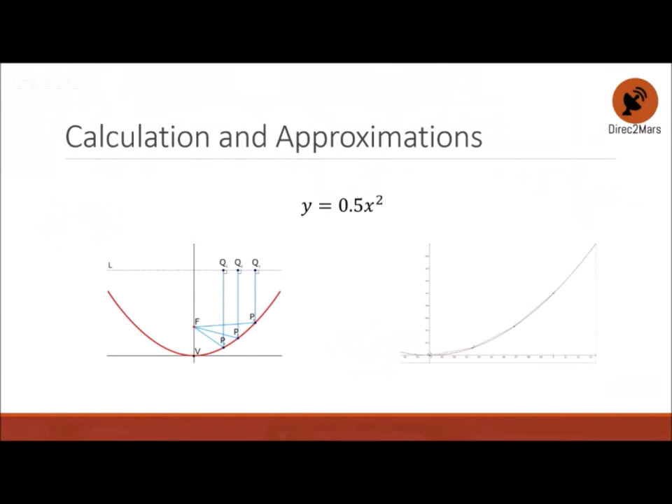Howdy. So this is our small scale model. We cut it halfway through so you could see this is the mylar film that we would use. This is the film that would project the rays back onto the receiver, and that's what would make this actually work. Beneath that, you have your skeleton, and right in the middle here, you can see that it is a central ring that he was referring to.

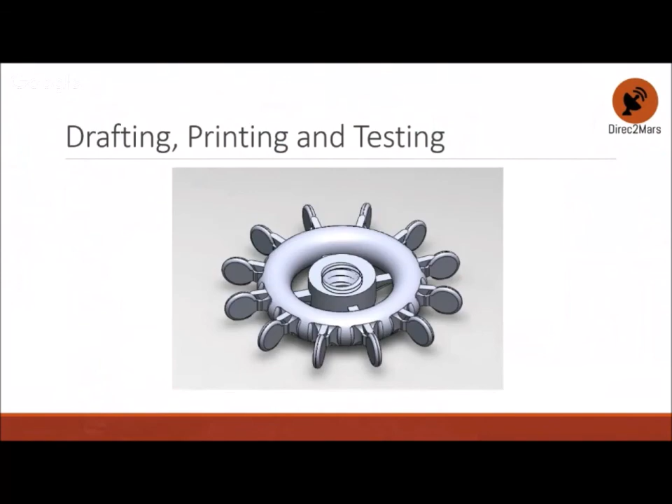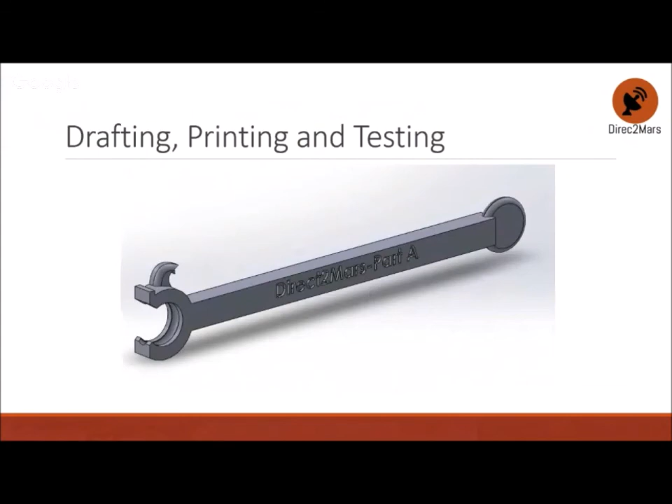Now, this central ring will have 12 heads, such as that, and that's how this mill head will clip onto it. Now, if you notice, there's a groove, a big kind of structure at the top that prevents it from moving too much in this axis. So the groove he was describing was actually the one you may see in the C shape on the left side of this diagram, and the circular shape there actually fits into the groove, so that it will hold it and it won't wiggle from side to side, similar to a ball bearing.

And instead, it's going to give it 1 degree of rotational freedom, so that these things can move up and down to act like a parabola and sort of fill the shape. So if we could just raise it up a little bit. Yeah. So you see, these are all bents and they have little joints in them. So every joint allows us to further approximate having a parabola shape and allow us to get a better amount of signal going towards the center receiver.

And this is when we get back to the receiver itself. So the receiver is mounted upon just a normal rod. There's nothing special about that. But if you look closely, there's a thread right here and a thread fitting right in the center of the ring. The reason we did this is because you're always going to have to adjust the height of this receiver to get the best reception. So if you were to turn this clockwise, you could decrease the height, and counterclockwise to increase the height to get the most effectiveness out of this device. So the foci is going to change based on how you angle the arms. So what he's saying is you just adjust it up and down to compensate for the different scenarios that you may be in.

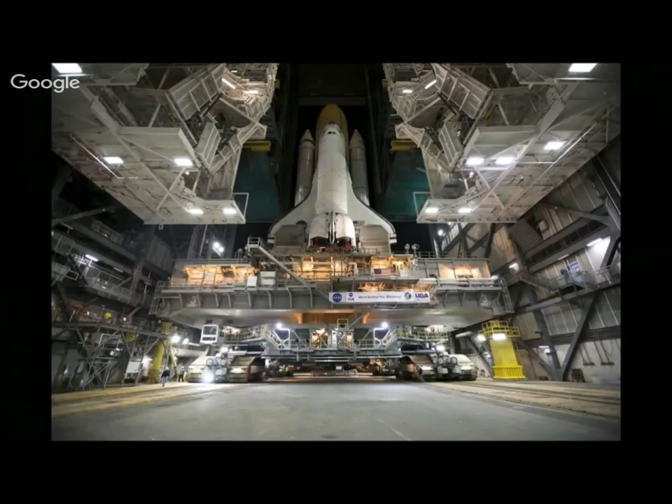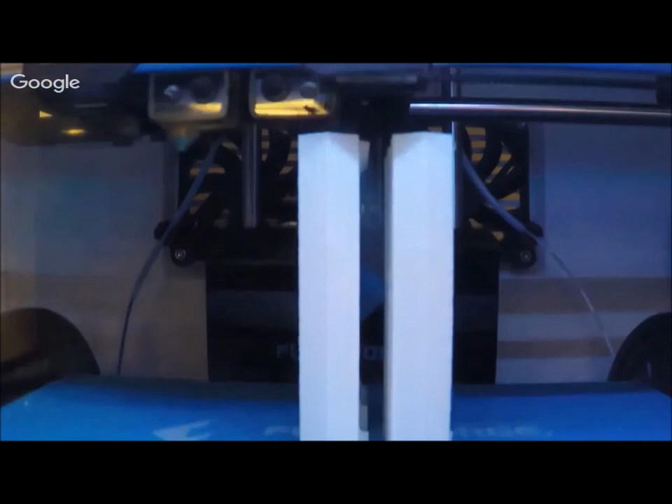To explore the unknown, humankind must continually innovate to create opportunities for growth and development. Growth requires building the amenities we as humans require to survive new and changing environments. Currently, we are limited in this capacity by our inability to build locally in microgravity. The solution is a Tensegrity prism. These prisms allow the 3D printing of lightweight, strong, independent structures that can be combined to construct super stable habitats, robotics, and much more. Our self-stabilizing 3D printable prisms are designed to be easily printed and combined in a low-gravity environment. This allows for a maximum variety of uses from a minimum volume of material.

Imagine a world where living in space is not just possible, but easy and enjoyable. Cruising along on Tensegrity-based space colonies. Everything you need for a life in space, possible due to the flexibility and power of the Tensegrity prism.

To tell you more about what a Tensegrity prism is and how it works: a Tensegrity prism is basically made of three rods and 9 strings. The 9 strings are in tension, which also puts the bars in compression. And these Tensegrity prisms are building blocks that have 90% less mass than is otherwise required to hold a certain weight on top of it. So this reduction of mass and its ability to be folded into a simple thing makes it a very movable object.

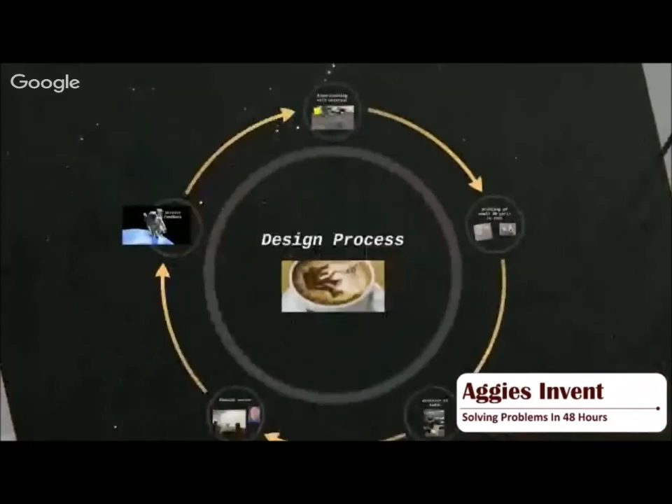And in our case, for the 48 hours we've been here, our main problem was to design it to be able to print this same thing in space, and that meant we'd be able to reduce the mass of material that we needed to take to space, and also reduce the cost of space construction. So for the 48 hours we've been here, we looked at research materials.

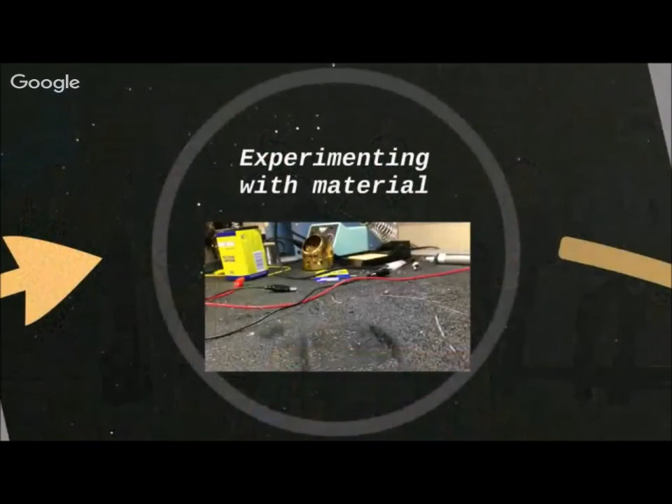We printed small parts of the model so that we didn't waste time, and we could measure and see if they fit into each other. And we divided our labor according to the expertise of each member. We had a lot of discussions with our mentor, Dr. Bob, who's the inventor of this prism. And we also had a lot of feedback from our astronauts and experts the whole day.

Now I'd like to pass to Garrett, who's going to talk more about our tensegrity prism. Thank you so much. So immediately, as soon as we got here, within an hour or two, we were already in our team with our mentor talking about how we're going to do this, because this is a very unique design that has the potential to have a big impact on building and structures in space. So we knew right off the bat that we wanted to build these, but we needed to 3D print them.

So the basis of the structure is that it's under stress, and that stress is what provides the stability. So how do we 3D print something under stress? The answer is you can't do that. So we needed to build the structure inside of the printer and then adjust it afterwards to create that stress, to create that stability. So we began brainstorming, and we came up with 3 initial ideas, the first of which was to pinch these strings. By pinching the strings, you pull the bars together, and that twists it into the stable form.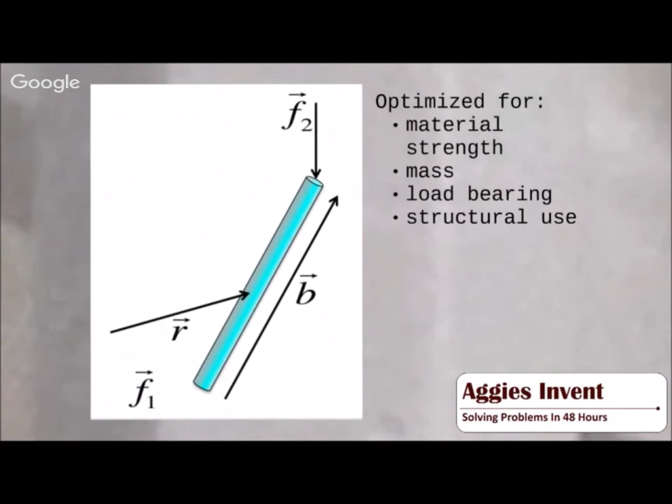So 3 inputs that we took into account when creating the MATLAB program were the maximum force, the modulus, and the bar length. Given those 3 inputs, we have outputs that will give us the length of the strings, the length of the bars, and the radii that we would need for it to be optimally strong and flexible, lightweight for any application that we would possibly need. And the significance of having a program is that it would reduce any possible failures, making this even more cost effective than it already is.

Next, I'm going to pass it over to Marcel, who will talk about the obstacles that we encountered. So the idea that we had about the shape memory polymer did bring a lot of challenges. One of them being its availability here. But we did get hold of some flexible wire, which ultimately has the same properties as the polymer that we were planning on using.

Now, how do we 3D print with pre-stress? So our idea was to use a polymer, and the 3D printer would actually heat it up and it would stay in shape. But since we don't have the polymer, we used the battery's voltage to create a current, which would later on heat up the wire.

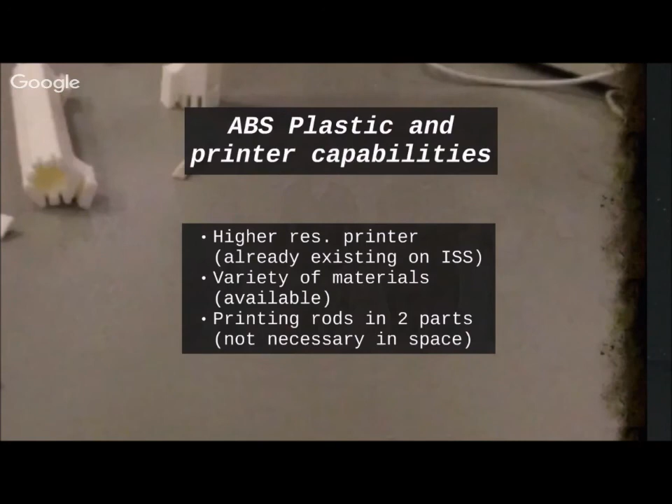Now, the material that we actually used was not as strong as we would like it to be. So when we were constructing the prism, it would actually bend. So hopefully the resources that we do have in space are stronger, and we are hoping to have higher resolution printers and stuff like that that would actually help on the building of the prism. And now Sab will provide some details of how we can use this.

Our 3D printed tensegrity prism that's self-assembling is going to be the building block of future space construction. Not only does it have a wide variety of uses in a microgravity environment, but also here on Earth for the purposes of deploying infrastructure and shelter in emergency environments.

Again, we want to thank everyone here at the EIC, and especially Dr. Bob Skelton for all the time that he spent with us, especially on that first day. Thanks. Thank you. It's time for a couple of questions.

Yes. Can you explain the self-assembly? I didn't understand. So we weren't able to fully incorporate it because of the structural problems that Marcelo talked about, but essentially we would be using the shape memory polymer in place of some of these strings. And along with the heat in the print bed, we would be able to print it in an unstressed state, almost flat. And then when removed from the heat of the print bed, they would tense up and automatically provide this design with no further assembly directly out of the 3D printer.

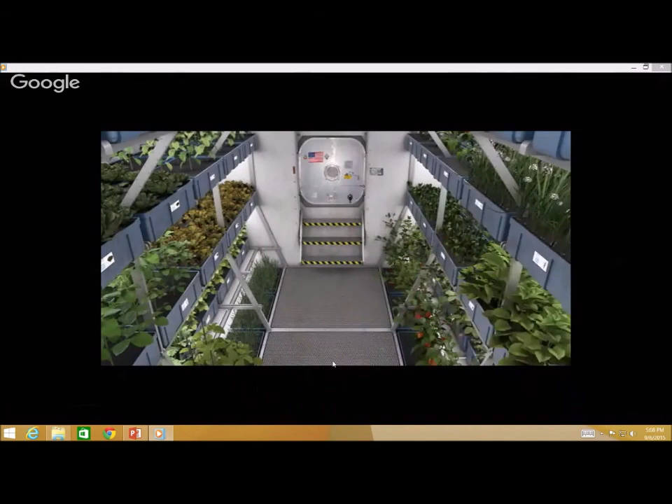Today, the majority of astronaut food is dehydrated and prepackaged. They have a mere 65 varieties of food, many of which lose their nutritional value in just a few years' time. Current NASA food production systems are not able to be expanded to support long-term sustainability. In addition, these systems require non-renewable supplies, such as plastic and soil, which have to be shuttled to and from Earth.

Introducing the HydroHex by Stellarponics. It's fully modular, printable in space, and utilizes pre-existing water and light sources. It supports the growth of a variety of fruits and vegetables, ranging from leafy greens, such as spinach and lettuce, to root-based plants, like potatoes, radishes, and peanuts. That means our astronauts can enjoy a well-balanced diet, rich in minerals, carbohydrates, and proteins. Stellarponics. Today's seed, tomorrow's sustenance.

Howdy. My name is JC Park. My name is Ray Villarreal. I'm Joseph Valencia. Kate Paps. Sneha Chawla. Wes Keene. And we are Stellarponics. We had the pleasure of working with our mentor, Dr. George James, and Ray is going to start us off with our needs statement and challenge.

Okay, so basically in our needs statement, one of the biggest things was that currently just to keep 6 astronauts in space for 1 year costs $90 million, just on the space shuttles sending food backwards and forwards. That's the status quo and it does not work. So our needs statement was basically supposed to be something reusable, sustainable, a plant containment system that could be printed as you needed it.

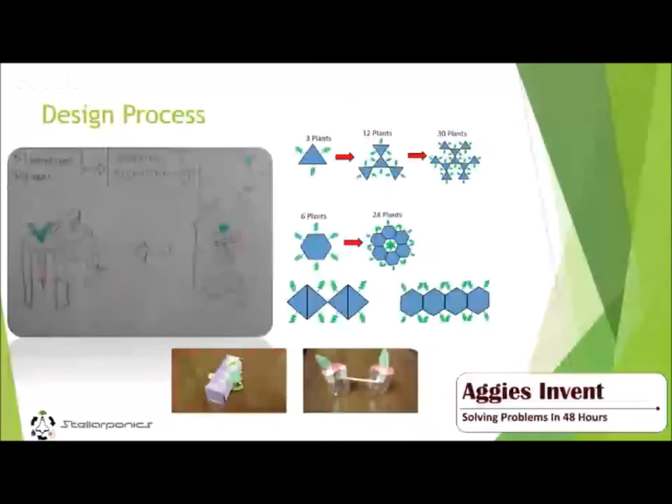Furthermore, that was just a piece of the design. We had other factors that we needed to consider, like whether or not we wanted to use soil or aeroponics, but we ended up deciding on hydroponics. And in all of these different features that you see, the bold word is the feature we ended up choosing underneath all of the different categories.

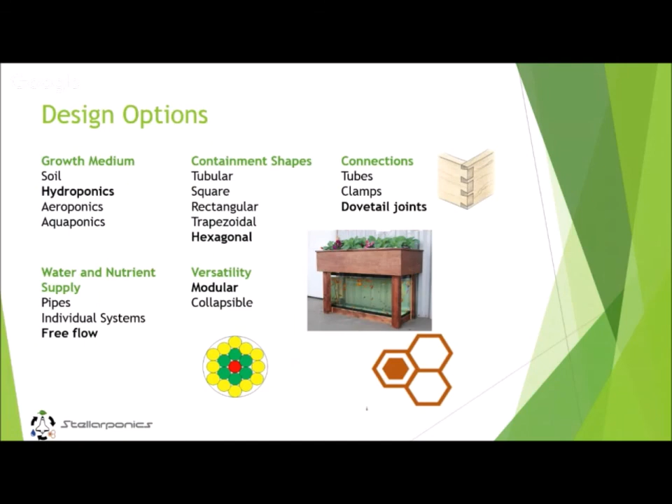Once we started working on this project, we all realized one of the most important parts of getting this to work is we had to have proper connecting joints. We decided to go with dovetail joints. And as you see on the top left picture, we started out with a full hexagonal structure, and we cut it in half to test the joints. We found out that took way too long to print, and we just wanted to test the joints.

So we decided to use less material, print individual legs, and we saved a lot of time on our printing and testing that way. We made several changes to tolerances until we found the one we wanted to use, and this is probably the most important part of our project, because without it, it's not modular. So we focused a lot of time on this, and we wanted to really emphasize the tight fit to keep the water inside and contained in the structure.

What we ended up deciding and based our decision around was that we wanted a real full modular design. So basically, versatility, so we could change it in different arrays, make the structure in whatever possible way we want, have fluid flow through it with the least number of parts.

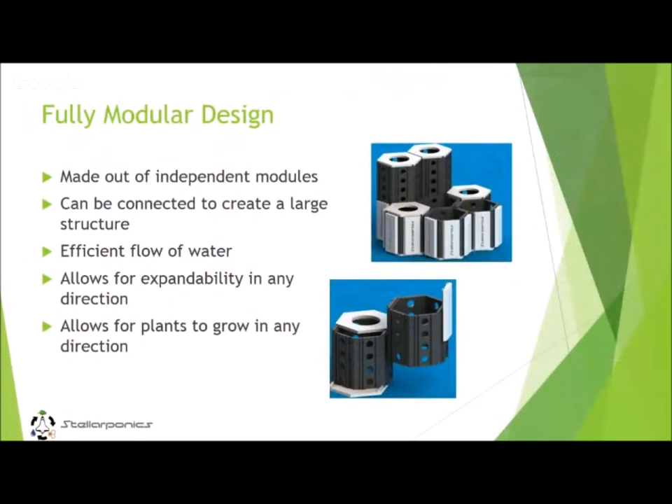If you notice, there's holes on the side for water flow. What you can do is have them next to each other all the way around so water flows, or you can cap it off. We make caps, and we were considering a cap or some kind of plug, but decided not to because we didn't want pieces flying around. Make it simple, just easy.

The other option you have with this design is that you can actually stack them, so you can grow long plants such as carrots or potatoes inside it, take it apart, clean it, take the plant out, and reuse it. If it becomes damaged, you can melt it back, just like 3D printing.

It's great, so we'll go to the next slide. Judges, you can remove it. The two are sliding one on top of the other. You could put it in, and it completely slides apart.

We also did a flow demonstration in SolidWorks, a CFD per se, and I included the documents on your table if you want to check that out. We picked a random flow rate, but increased it in different designs to see if the structure would actually flow, and if our structure would actually seal. Using surface tension, we did that well.

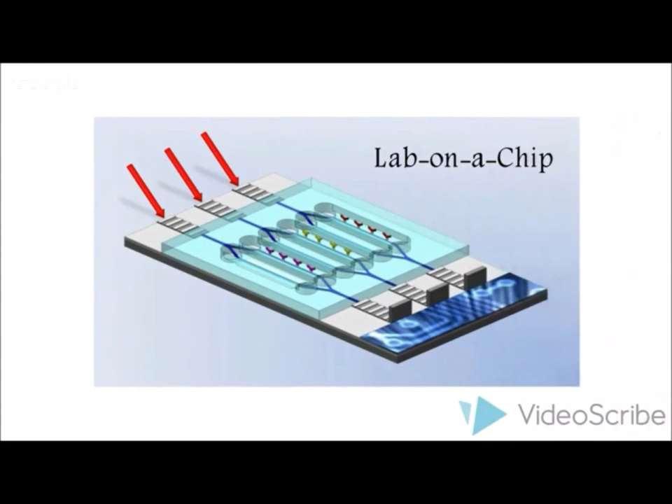A lab on a chip is a functional solution for these astronauts. These chips analyze bodily fluids to provide data, which can be used to reach medical conclusions. Labs on a chip can be applied to this problem astronauts face, but microgravity in space changes the rules we must play by.

Our microfluidic technology takes advantage of the capillary behavior of fluids. This negates the need for an external source of fluid flow. By removing these external energy sources, we can eliminate vital payload weight and cost for transportation. The speed at which bodily fluids can be analyzed is an extremely important capability. Utilizing 3D printing innovations in space makes this capability very affordable.

Microfluidic lab chips can be used on the International Space Station and during long-term space missions. Closer to home, this technology can be used in low-resource areas around the world. At Heilsa, we are designing these microfluidic applications for affordable, rapid prototyping. Join us as we fabricate the future.

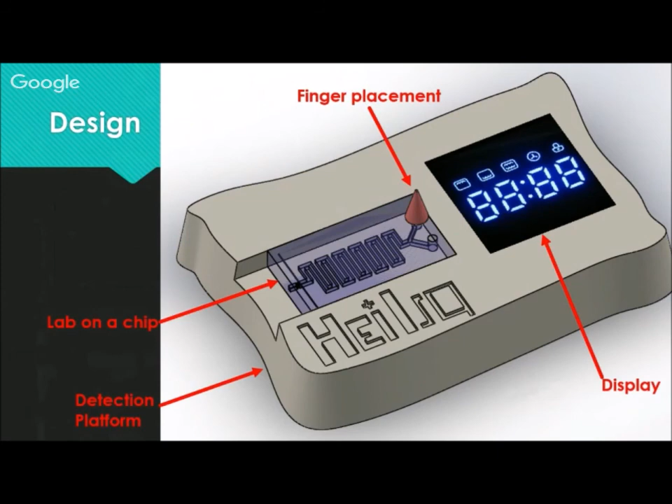So this is our final design that we came up with after going through all those brainstorming sessions. You see we have a detection platform at the bottom. Right on top of that sits a lab on a chip, which has microfluidic channels, hundreds of microns thick and wide. It also has a finger placement unit where you punch in and it draws liquid. I'm going to have my colleague pass around some samples and prototypes for you to look at. We also have a display so we can show the readings and samples.

Because we talked to a lot of astronauts, especially ones who worked on the ISS, and read simulations from NASA, we know capillary forces will be the dominant effect in the microfluidic chips. Once we put the blood on the chip, it will immediately draw in, so we don't have to worry about any external pumps.

The second goal was to actually fabricate the device. For that, we used three different printing technologies. We used extrusion printing, and tried to generate some of these devices, as you can see.

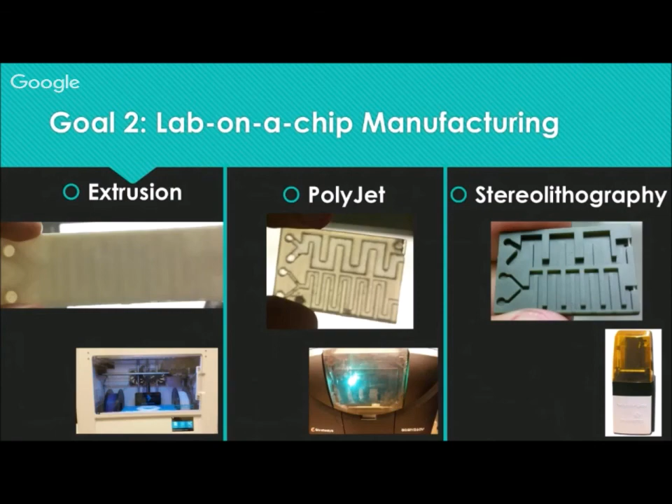It wasn't clear for us to actually see anything with the first device, which was extrusion produced. The second one was polyjet printing, which we tried to use, but we had material depositing issues, so we couldn't really get the material to come out. The third one was stereolithography, which gave us the best result and what we went with, and we could actually print at hundreds of microns resolution using this 3D printer.

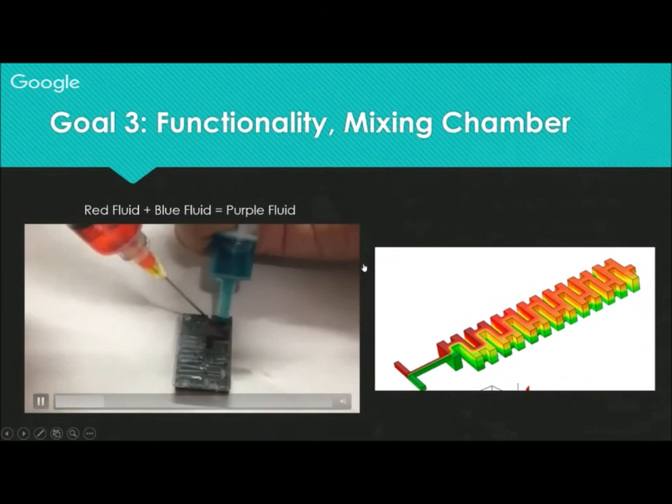So that's why we increased the surface area by making this S shape, which allows time for the fluid to flow and mix. The video demonstrates that, where the red and blue liquid mix to form a purple liquid at the bottom of the channel. As you see, the purple colored liquid comes out as the two liquids mix towards the end of the channel.

The next part of functionality testing was detection, because we want to be able to capture something. Since we could not do a biological study in this environment because of IRB and IBC reasons, we had to resort to some kind of simulation.

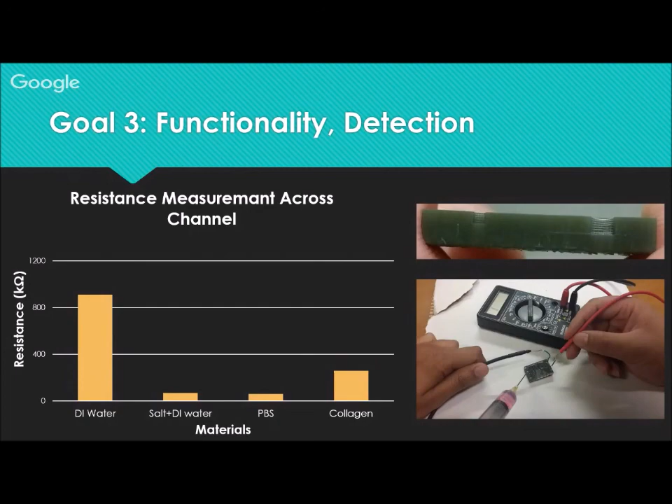So what we did was test DI water. We mixed the water with salt, checked PBS, which is a buffer containing some ions, and tested collagen microspheres, 200 microns, mixed in PBS, trapping them in the membrane right here. We were able to fabricate a mesh that was 100 microns porous, and we were able to capture these microparticles, as you can see by the change of resistance for the collagen particles.

For cost analysis of our design, we had to take into account how NASA currently works with biological substances. To actually analyze bodily fluids, astronauts have to send their samples back to Earth so they can be accounted for. In general, for an ISS to Earth cargo cost, it's approximately $10,000 per pound of cargo.

Prototyping on the International Space Station with our design would be approximately $10 per chip, excluding the cost of the printer because we assume it's already been acquired. But the real important part here is saving time in analysis and diagnosis through the bodily fluids. In normal clinical settings, you have to wait at least 3 to 4 days to get a result from your doctor. With the ISS, you can definitely get it quicker.

Further application of our design is obviously healthcare monitoring in deep space. This isn't capable yet, but our design is modular enough to be useful. It also provides low cost and pre-diagnosis methods in already developed nations. You might have heard of this as personalized healthcare. If you prick your finger and find out that you might need to go to the doctor, you take a lot of the guesswork out of it.